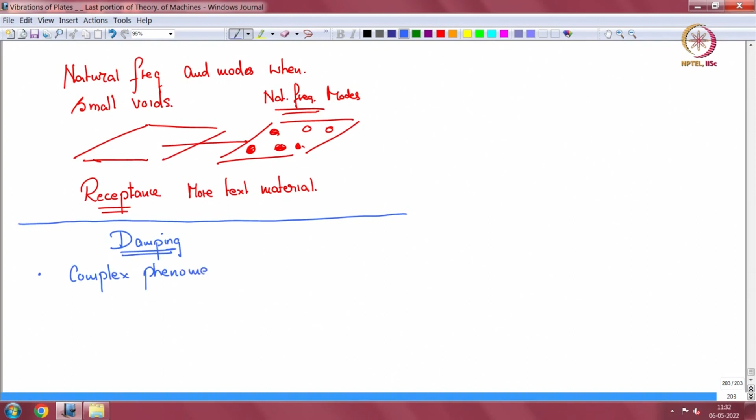Damping is a complicated, or complex, phenomenon. Let me tell you that this particular course which I am teaching, I myself learnt it from Professor Soedel. When it came to this section on damping, he said that he came to study mechanics with the intent of figuring out what this phenomenon is. Towards the end he concluded that it's a very complicated phenomenon, you cannot really nail it down. Yet it's part of all dynamical systems, and we deal with it by taking support from experiments and figuring out some empirical values. So I will put some thoughts together, because even in pure analytics you have to include some damping for meaningful results.

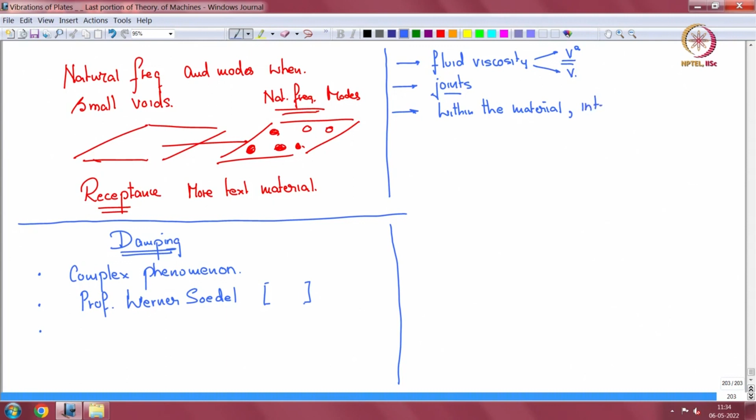Now damping comes from many different directions, and you can have it coming from fluid viscosity. As you move in a high speed car you will have wind blowing against you, so there's a drag that will take out energy from your mechanical system. Energy can be taken out at joints. When you have joints in a system you can have energy taken out. And you can have energy taken out from within the material. Here itself there can be a nonlinear component where the damping is proportional to velocity square, or in the normal way proportional to velocity. There is damping within the material, which we call either internal damping or hysteretic damping. So you have many sources of damping.

The boundary conditions may not be very strict. The boundary is not strictly clamped or supported, so the boundary leaks into the neighboring material. So if a cantilever is not strictly clamped over here, there is energy flow into the wall. So there are many ways that damping occurs.

Now if you do a modal test, suppose you take a simply supported plate, and you hit it with a hammer and measure it with an accelerometer, then you will see this sort of graph in your frequency response function, plotted on a log scale. These peaks are your resonances, and the peak value and the way it rises, this region around the peak is dominated by damping. So what we do is find the modal damping coefficient. Typically we do this using the half power point method, to figure out this zeta k or zeta mn.

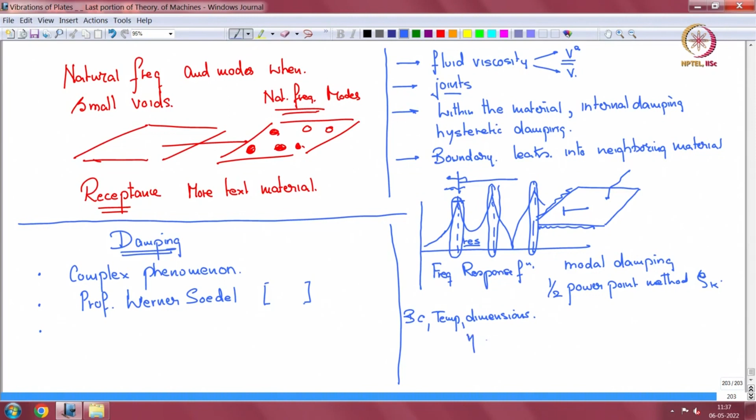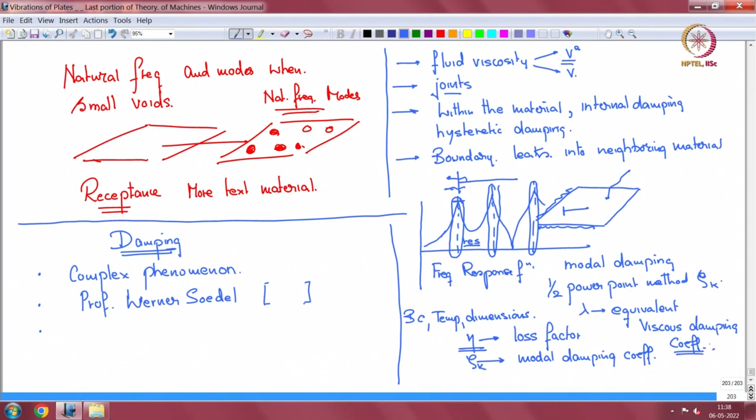Given that the nature of damping is very complicated, it comes from many sources and it changes with boundary conditions, with temperature, and with the dimensions of your system, we will put some sense into how this internal damping, which is signified by a loss factor, works. Eta is typically used to denote a loss factor, whereas zeta k is typically used to denote the modal damping coefficient. And in the text, lambda has been used as the equivalent viscous damping coefficient. So we'll connect these three. This is nowhere an exhaustive presentation of damping, but we need to know something.

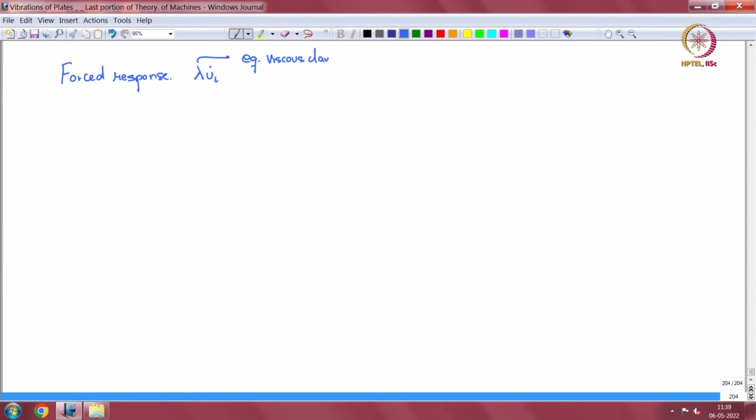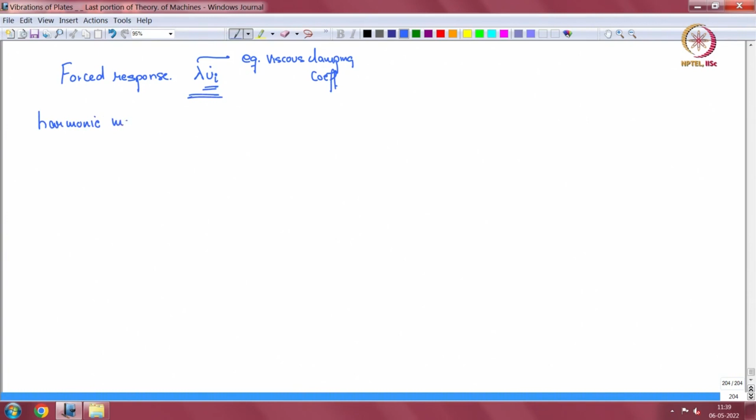So in the forced response, when we looked at it, we used the damping term as lambda times u i dot. This is the equivalent viscous damping coefficient, and there is a velocity in the ith direction. So some fluid behavior is taking out the energy from your vibrating system. It is proportional to lambda times the velocity in each of the directions. That is the idea. And we are looking at harmonic motion. Then u i is equal to some capital U i sin omega t. This is the displacement in the ith direction. I is 1, 2, 3. So alpha 1, alpha 2, alpha 3, back to square 1.

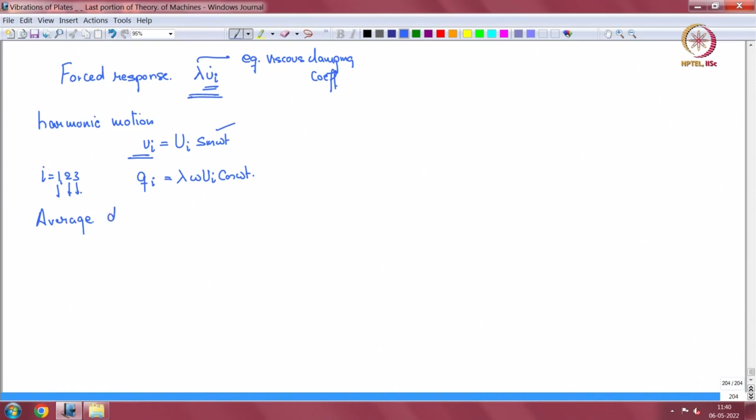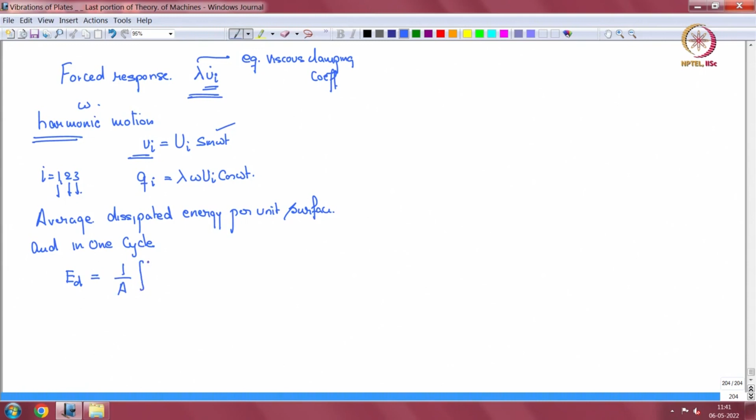Then what is the force? Force in the ith direction is lambda times the velocity, the derivative of this, which is omega U i cos omega t. So what now is the average dissipated energy per unit surface area and per cycle, or in one cycle of vibration, because it is harmonic at omega. We denote by E D the energy dissipated per unit surface area. So we have the area integral. We sum in the three directions and integrate over one cycle time period. Then lambda and force into velocity. Force into velocity is power, integrated over time is work. So lambda, we will have a squaring of this quantity: U i square omega square cos square omega t, integral over time, integral over surface area. A is the surface area of the shell.

So if we carry this out, what we will get is that this will give you a half. So that gets me lambda pi omega, 1 over A, integral over the surface area.

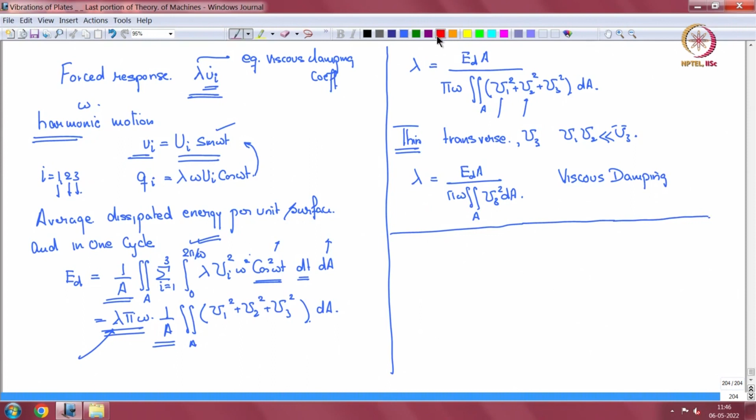Now we look at internal damping, or hysteretic damping. That is, if you take a longitudinal specimen and subject it to oscillatory forces, what will happen is that the force and the displacement will not be always a straight line falling on top of each other. It will acquire a width.

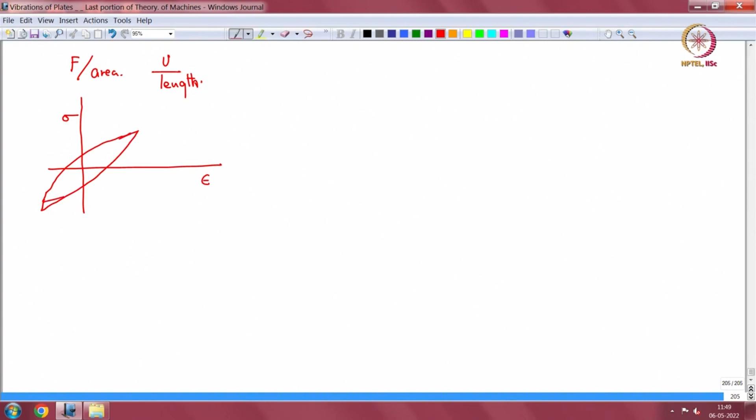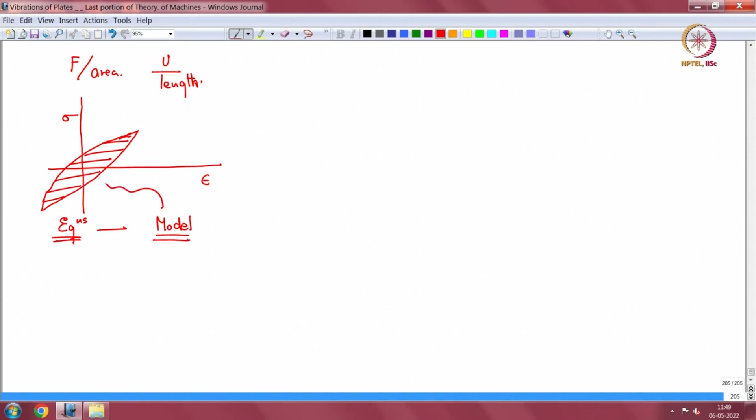Now, if we put this in terms of equations, and develop a model which reproduces this behavior mathematically. To start with, this is a 1D specimen, so sigma is E times epsilon for a rod. Then sigma we can say is some sigma max, oscillating at sin omega t. And what is this sigma max? Sigma max is the max force by area of the specimen. So what is it now in terms of strain epsilon? It is sigma max divided by E sin omega t.

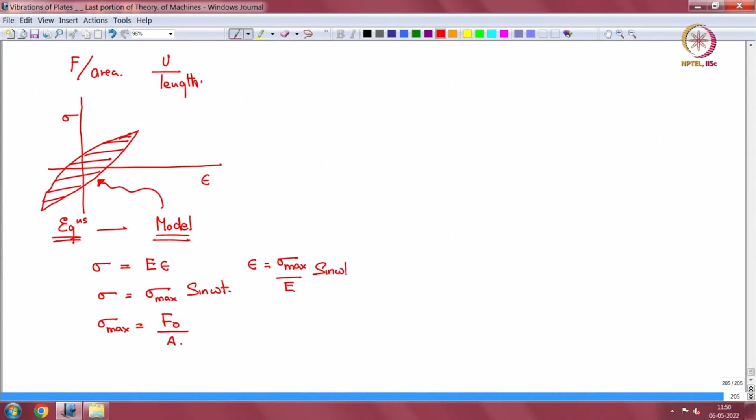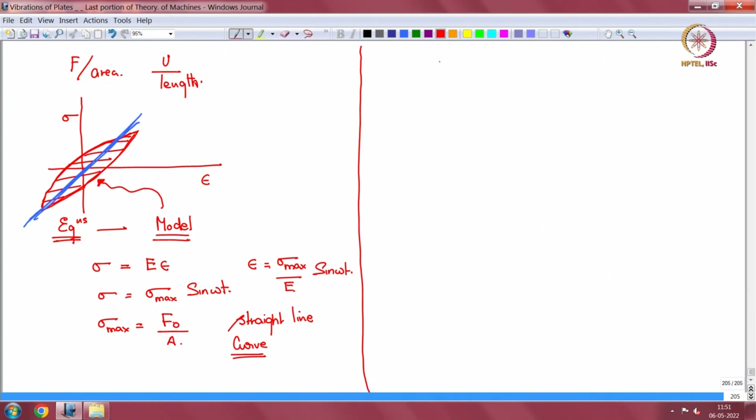Now this is what Hooke's law suggests. But this gives graphically a straight line curve, so it won't give this bulged elliptic region. It will give a straight line as you oscillate. So now we have to develop a model.

What we do is we take epsilon, we take sigma max sine omega t, and we bring in a modulus which is complex. The Young modulus is now complex. As a result, we get sigma max, and if we convert the denominator into magnitude, we get E square root of 1 plus eta square, sine omega t minus phi. And what is phi? Phi is tan inverse eta.

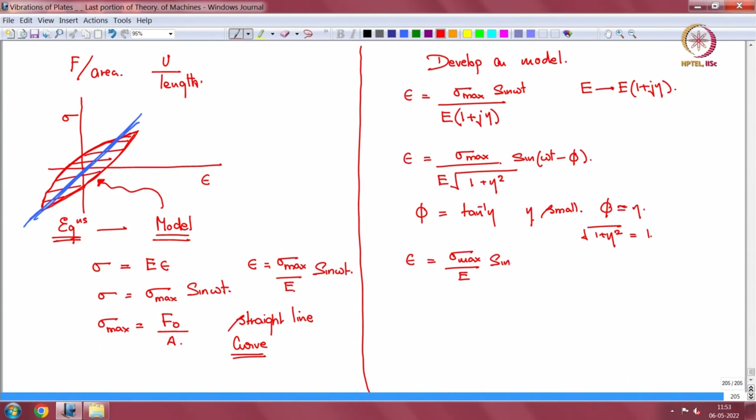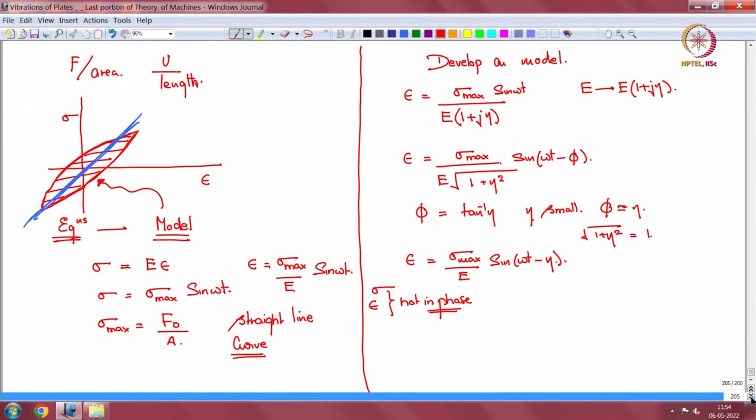It is known that eta is typically small, so phi is approximately equal to eta. So that square root of 1 plus eta square is taken as 1, in which case epsilon turns out to be sigma max over E sine omega t minus eta. So what this now says is that sigma and epsilon are not in phase. So now what we get over here is an elliptic shape. So if we plot it,

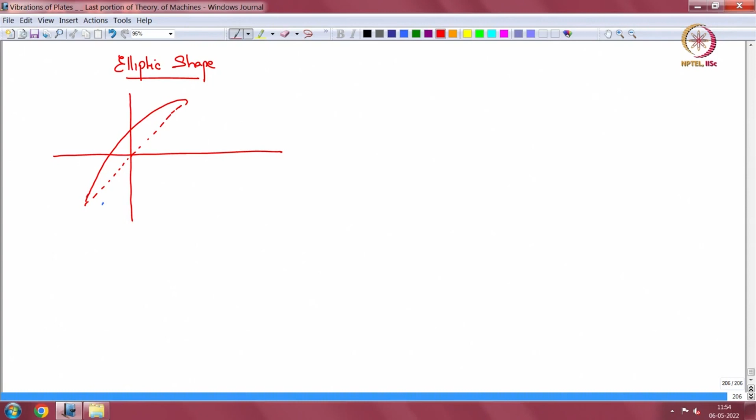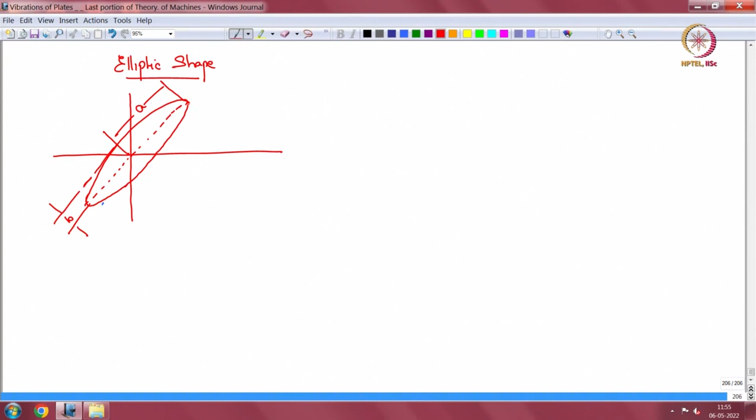Okay. So then this is your half major axis, and this happens to be your half minor axis. Then this is your maximum sigma max, and this happens to be epsilon max. And this portion is your sigma max by E eta. Okay, and this angle is alpha.

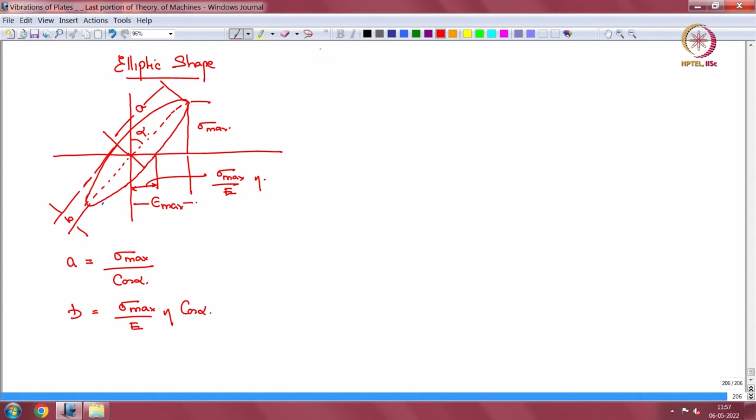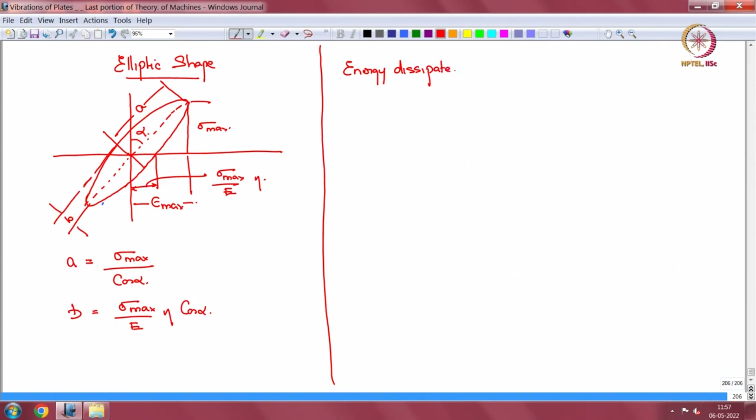Now, what is the major axis? Half major axis will be sigma max over cos alpha, and the half minor axis is sigma max by E eta cos alpha. And what is the energy dissipated? We said it was equal to the area of the ellipse, and it is energy dissipated per cycle and per volume.

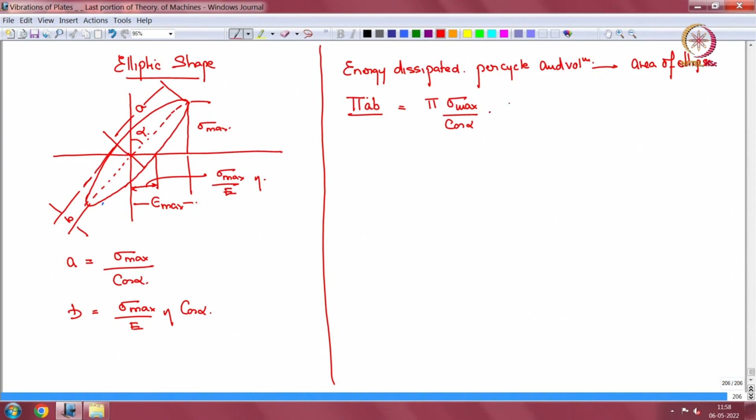The area of the ellipse is pi A B, which is equal to pi times sigma max by cos alpha into sigma max by E eta cos alpha, which is equal to pi by E sigma square max eta, or pi E epsilon square max eta. This is E1. Don't confuse this E1 and this E. This is modulus. So this is per unit volume.

So the total dissipated in the volume is length into breadth into h into this quantity, pi E epsilon square max eta. Now, maximum strain energy, this is what is lost. So what is the maximum strain energy in the test specimen? What is the U max?

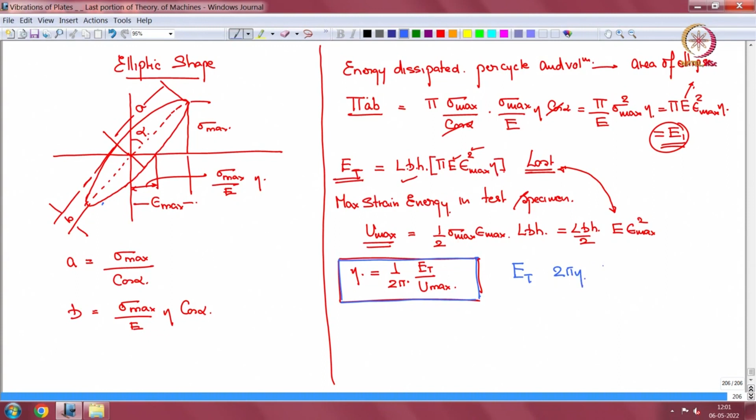If we connect these two, Umax is LBH by 2 into E epsilon max square. We substitute Umax in here, then what we get is eta, the loss factor. So the dissipated energy is twice pi eta times the Umax per cycle. This is a 1D specimen; for the case of a shell also we will extrapolate and say it is twice pi eta Umax, where Umax is the peak strain energy in the shell.

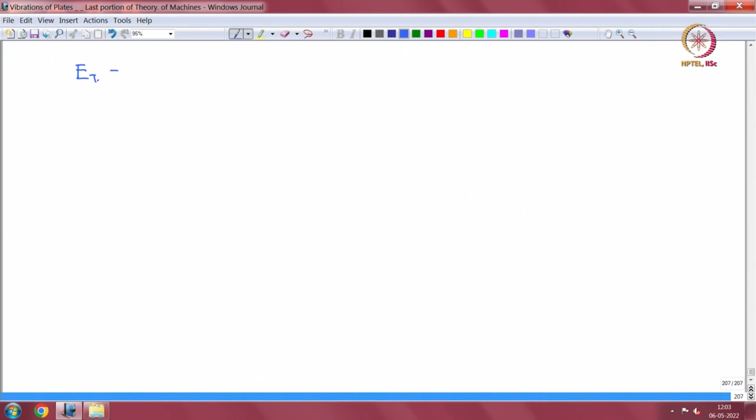Then the energy dissipated, ET, is equal to twice pi eta Umax. If you want it per cycle, per unit surface area, then we divide by surface area. So we get twice pi eta Umax by A.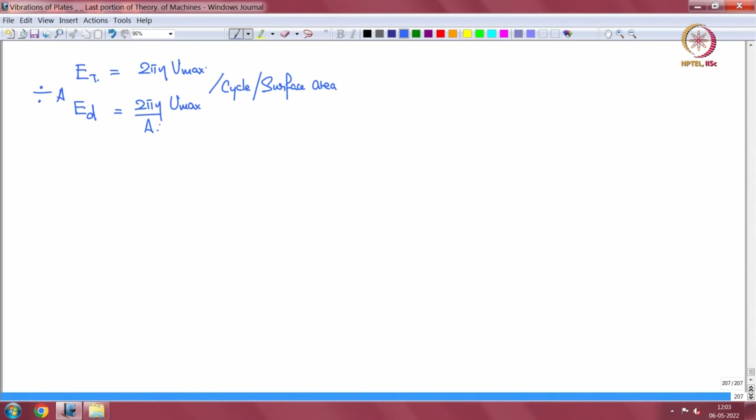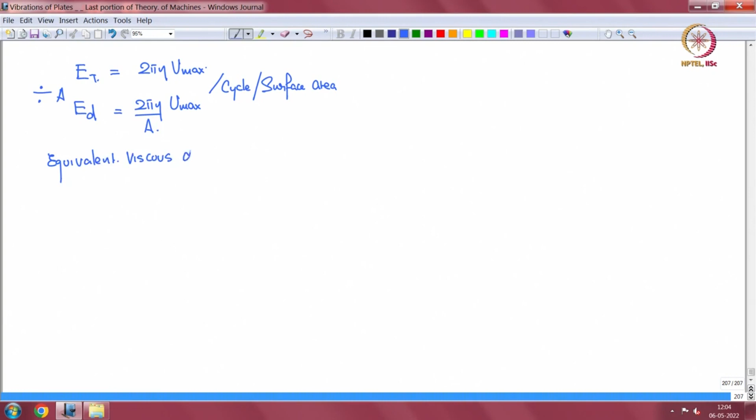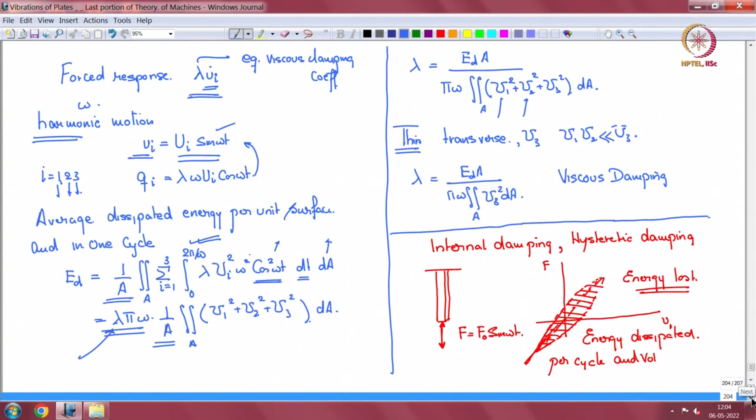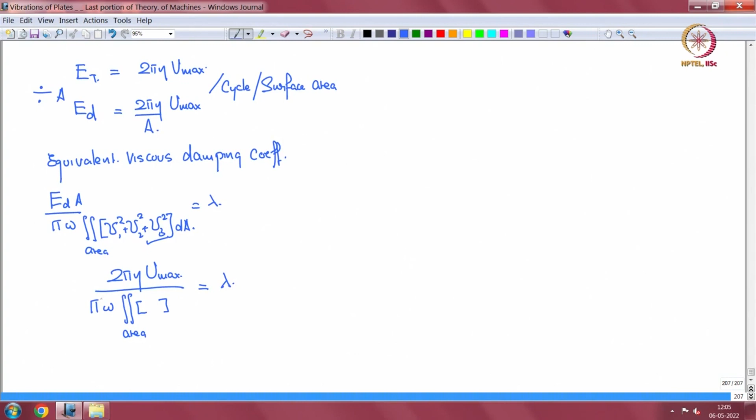Now the equivalent viscous damping coefficient. What did we do earlier? It was EdA by pi omega times the integral over area of U1 square plus U2 square plus U3 square dA, and that was equal to lambda. Now EdA is twice pi eta Umax, divided by pi omega times this integral, and that is equal to lambda. This is how lambda and eta connect, how the equivalent viscous damping coefficient and the loss factor connect.

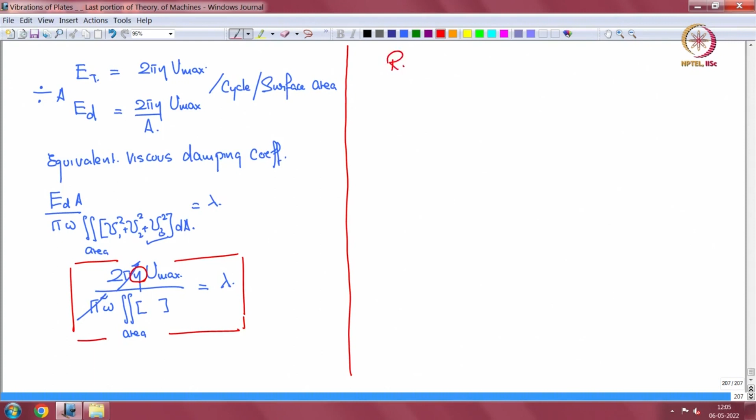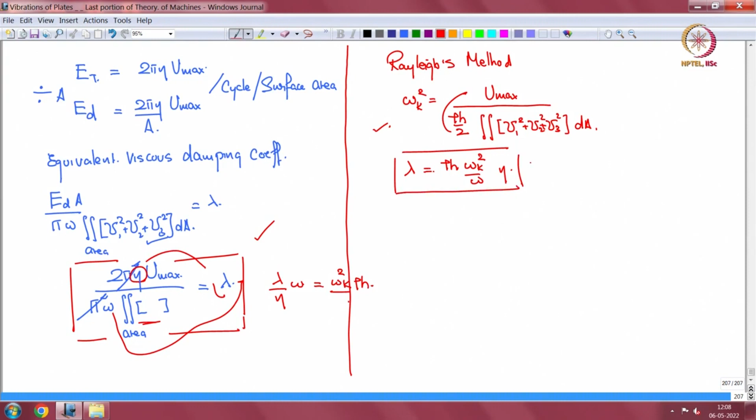Now if we remember Rayleigh's method, the Rayleigh quotient, what was it? Omega k square was Umax by rho h by 2 times the integral of u1 square plus u2 square plus u3 square dA. From these two we can connect eta, lambda and omega k. So lambda is equal to rho h omega k square by omega into eta. Lambda by eta into omega is twice Umax by this integral, which is equal to omega square k rho h if we bring 2 up here. So this is also a connection.

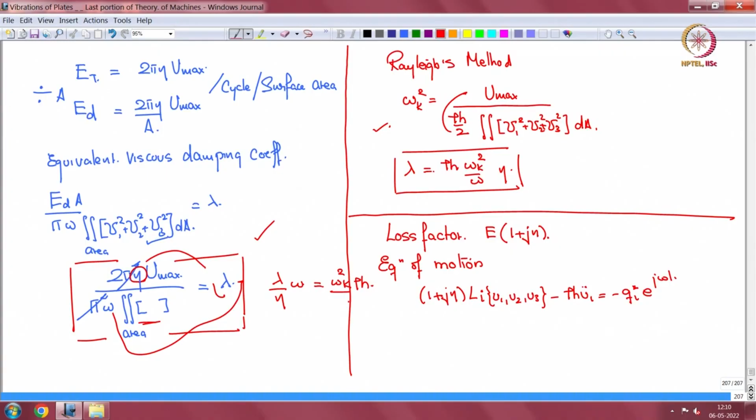Now, how do we connect this to the modal damping coefficient? We did it using the viscous damping coefficient. If we bring in the loss factor through the complex modulus, then in the equation of motion we get 1 plus j eta, L i of small u1, u2, u3, minus rho h ui double dot, is equal to minus qi star e to the power j omega t. I think we are running out of time, so I'll stop the lecture here and continue from the next class. Thank you.